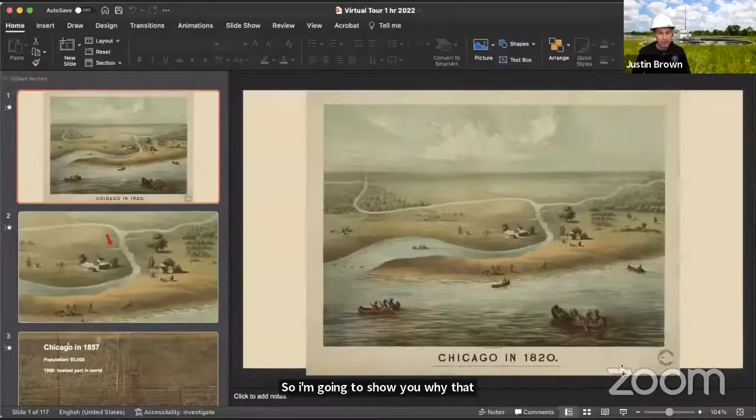Here's downtown Chicago in 1820. You can see some spots where the artist indicated that the banks of the river are not very well defined, maybe where the Clark Street Bridge is today. It looks a lot different. The city grew rapidly around the river.

In 1868, we had the busiest port in the world on the river. So the river was a transportation hub.

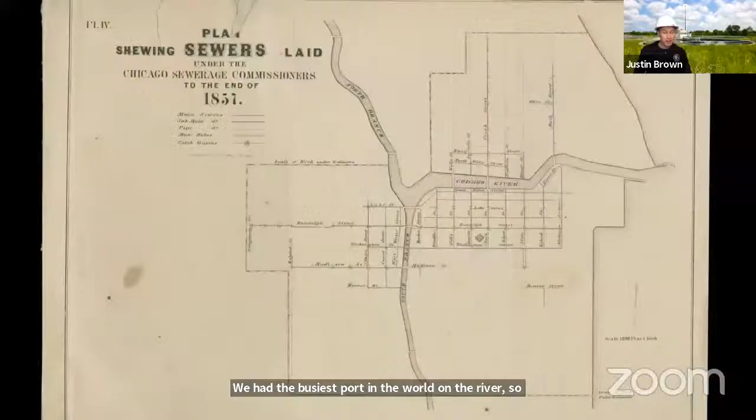The city began work on a sewer system in the 1850s. This map shows the beginnings of that system, which would become the first comprehensive sewer system in the US. It was originally designed to do two things: drain rainwater straight into the river, and carry sanitary sewage from homes and businesses straight into the river.

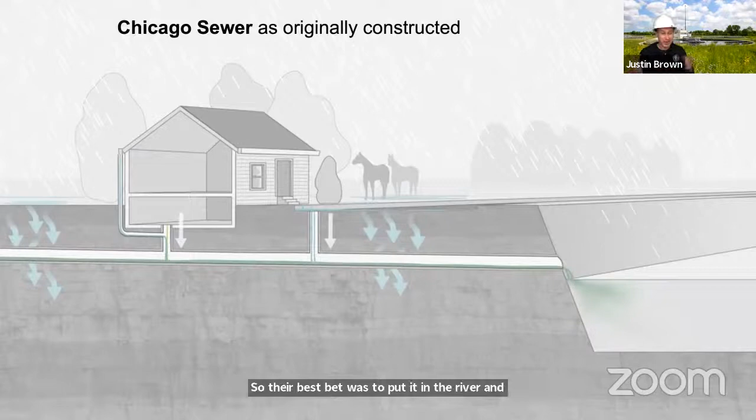Now, why would you put raw sewage right into the river? At the time, wastewater treatment technology didn't exist, so their best bet was to put it in the river, dilute it, and hope for the best. You can imagine that caused some problems, and we'll come back to that.

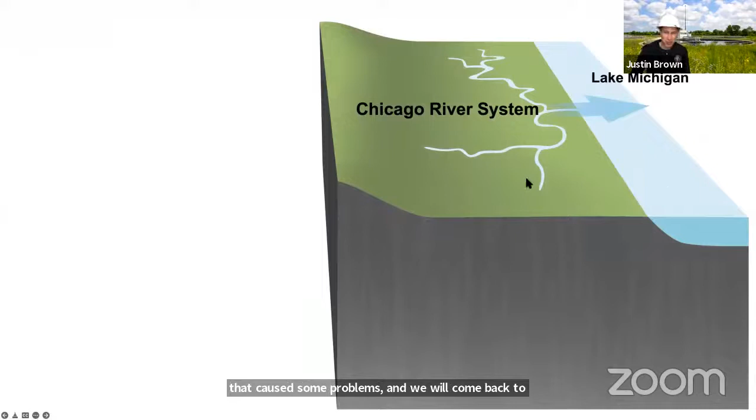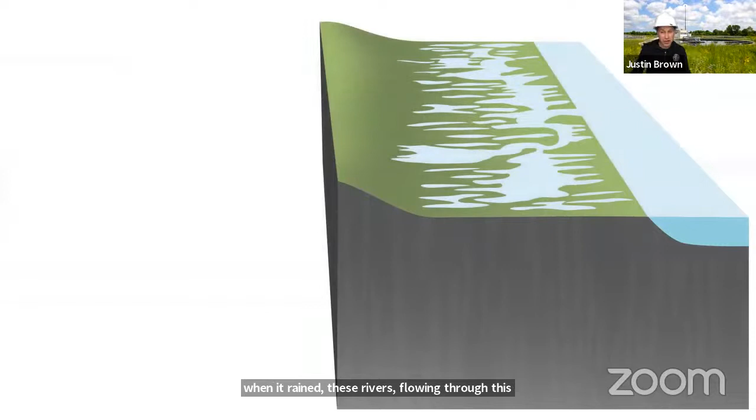This illustration shows the rivers as they originally were, draining out into Lake Michigan. When it rained, these rivers flowing through the flat landscape would spread out and flood a wide area. That's where the city was built, around the river. The sewers provided drainage, but they also polluted the river and flowed out into the lake, releasing pollution into the lake.

Our region's water supply source is Lake Michigan, so I think you can probably see the problem here. The river was threatening the water supply source.

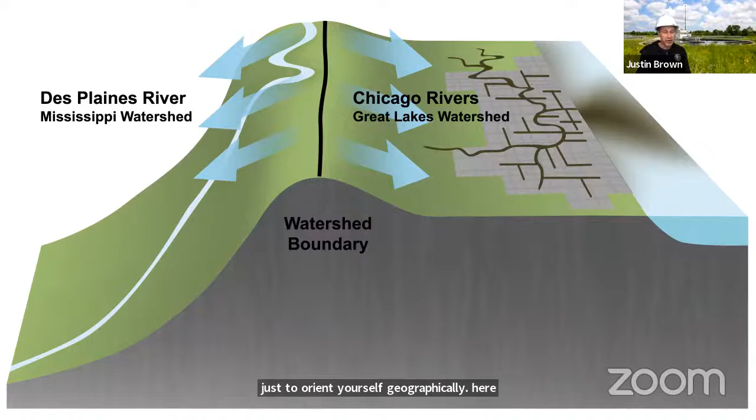Just west of Chicago, there is what's called a watershed boundary. You all, I believe, are in Westchester, so you're actually on the other side of this watershed boundary, just to orient yourself geographically here. A watershed boundary is just a high point in the landscape where water flows downhill on either side of it.

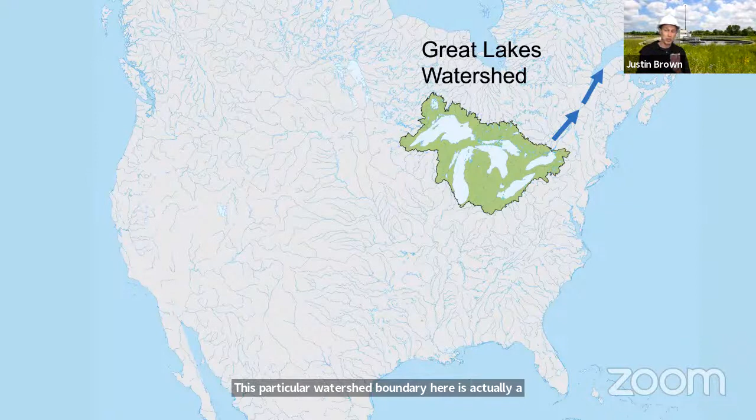This particular watershed boundary is actually a major one in North American drainage. The Great Lakes all drain out the St. Lawrence River to the Atlantic Ocean. The Mississippi River drains south to the Gulf of Mexico, and Chicago is right on the boundary between those two major watersheds. In that illustration I showed you, I exaggerated that hill quite a bit.

So we've got flooding in the city. Even with the sewer system, the flooding was still a problem. We have pollution threatening our region's water supply. The MWRD was founded in 1889 to address both of those problems by excavating a canal across that watershed divide.

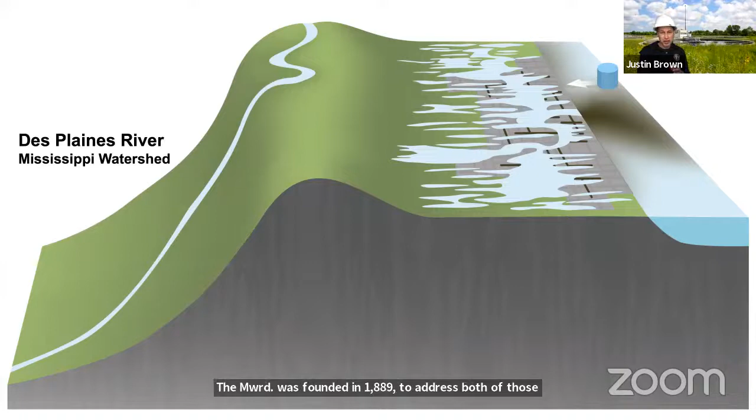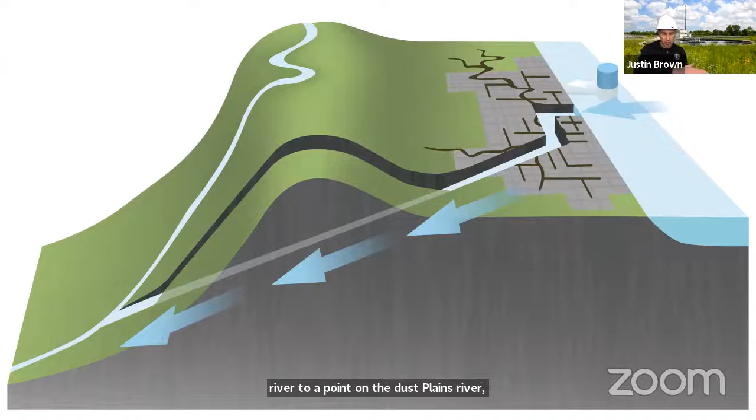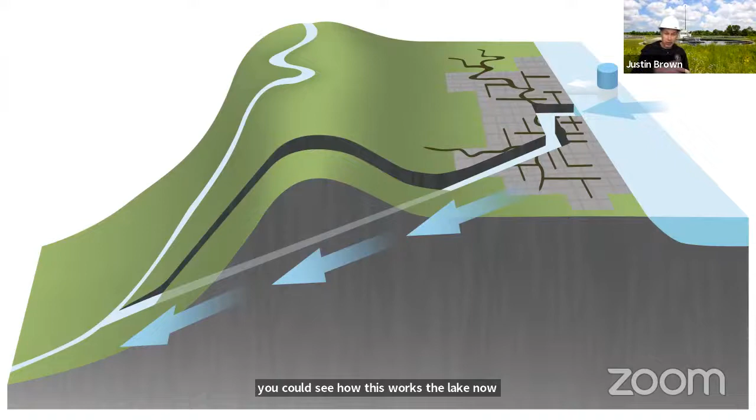The canal connects the south branch of the Chicago River to a point on the Des Plaines River in Lockport, Illinois, that's lower in elevation, about 37 feet lower. So you can see how this works: the lake now flows in at the mouth of the river and downhill just by gravity to the Des Plaines River across that watershed divide. So that's how you reverse a river. This map shows the rivers before construction of the canal.

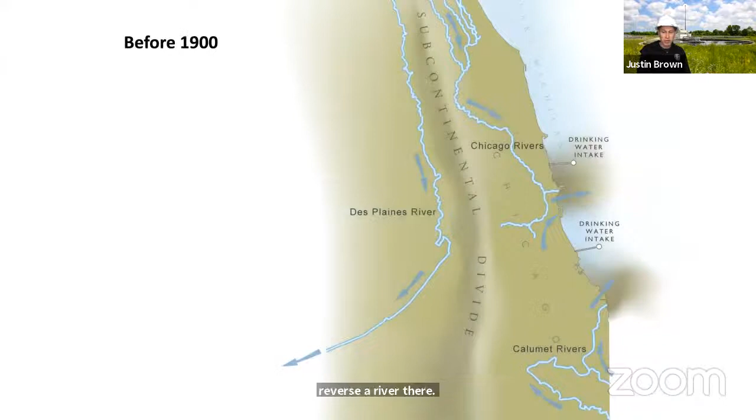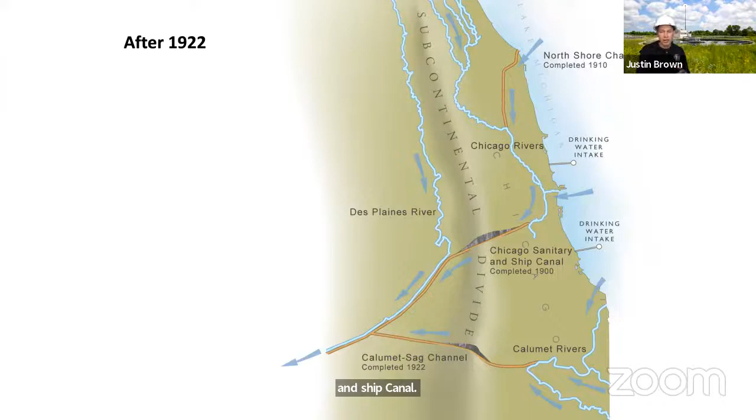Nothing like this had ever been built. Our chief engineer on this project went on to work on the Panama Canal a few years later.

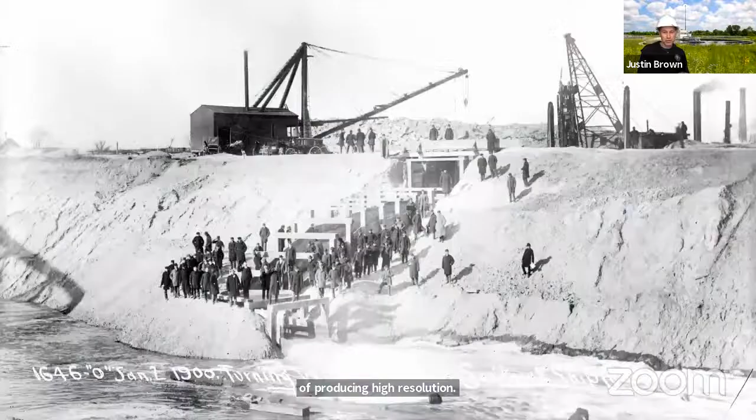On January 2nd, 1900, water was first turned into the Sanitary and Ship Canal. This is water flowing from the south branch of the Chicago River over an artificial dam down into the newly completed canal. This is the Sanitary and Ship Canal today.

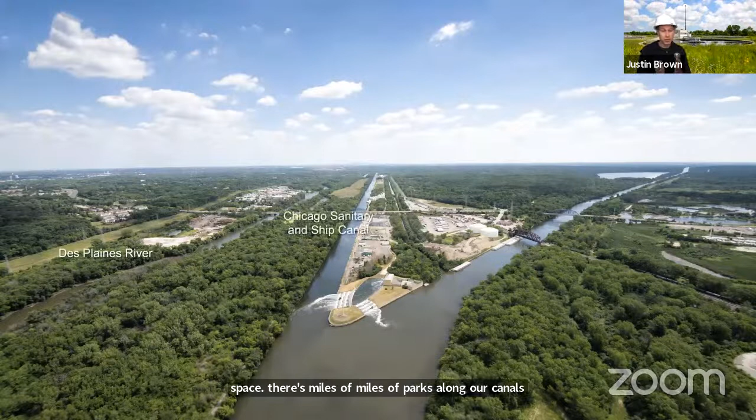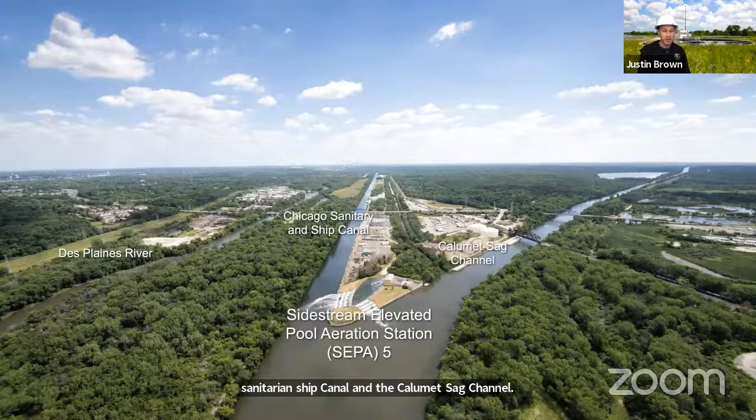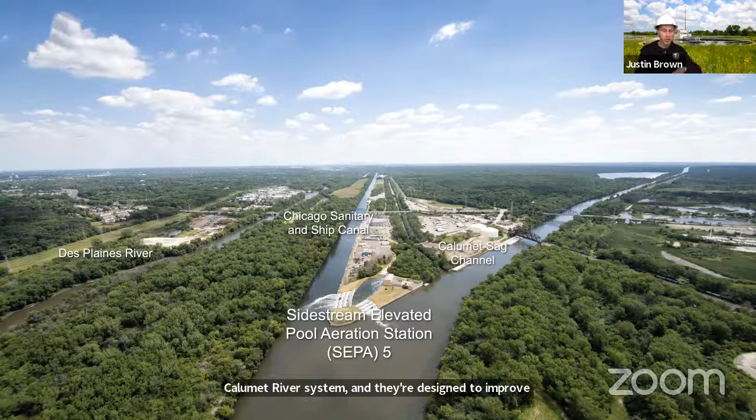This is the confluence, or meeting point, of the Sanitary and Ship Canal and the Calumet Sag Channel. That structure in the middle is a side stream elevated pool aeration, or SEPA, station. We have 5 of these on the Calumet River system, designed to improve water quality by aerating the water. They work by pumping the water out of the channel into a pool and then letting it flow over an artificial waterfall structure.

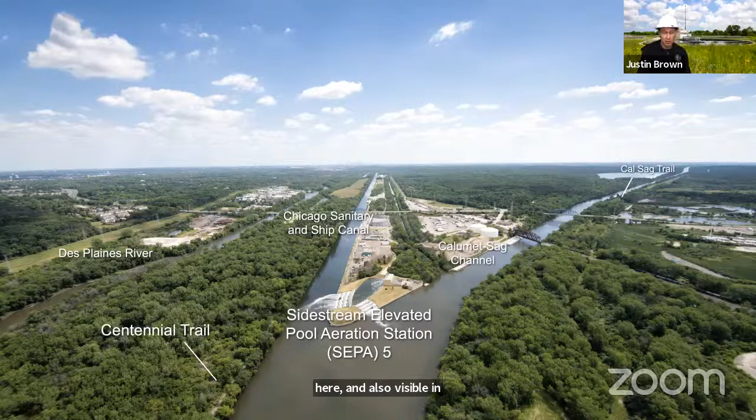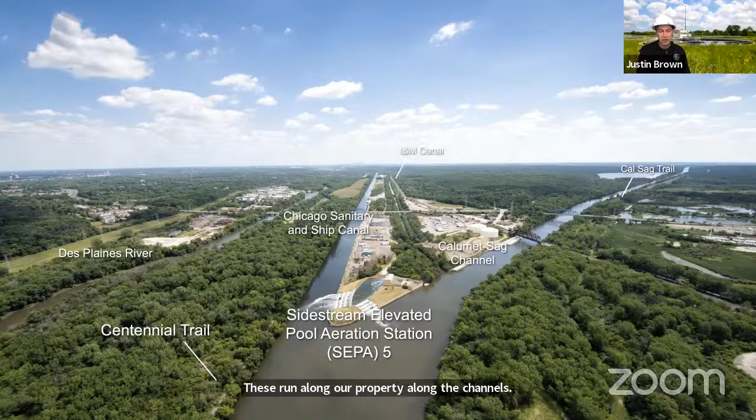You can also see the Des Plaines River on the far left here, and also visible in this shot are two great trails, the Centennial Trail and the Cal Sag Trail. These run along our property along the channels. And finally, that little channel you see there is the I&M Canal, an earlier navigation canal that predated the Sanitary and Ship Canal.

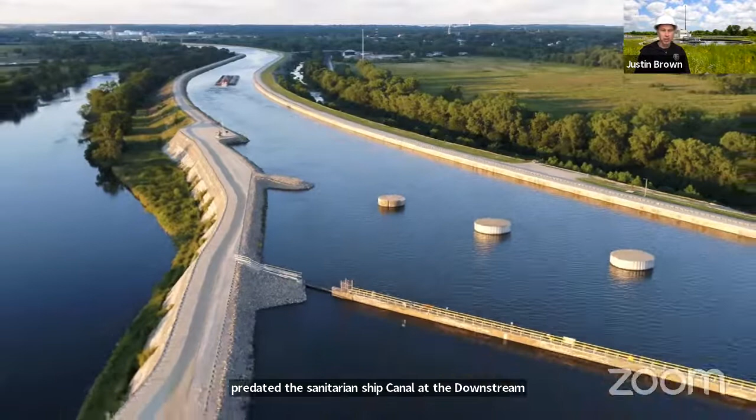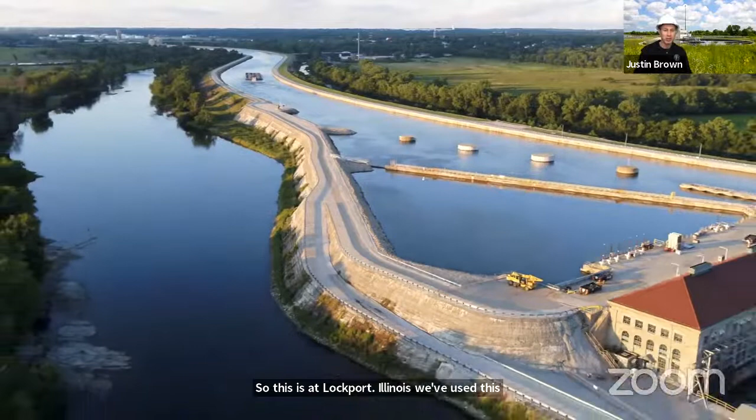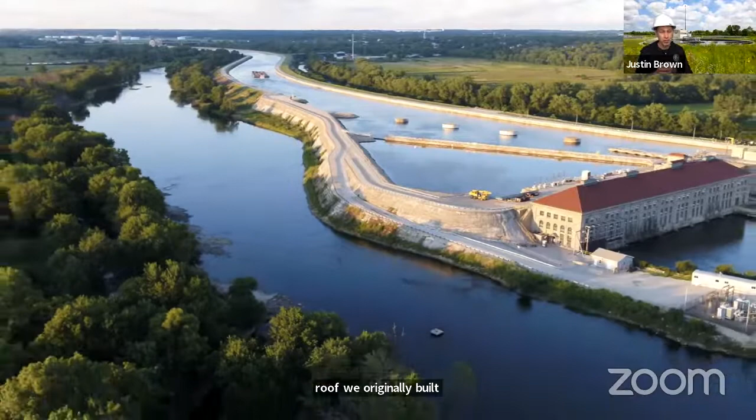At the downstream end of the waterway system, there's a 37-foot elevation difference between the canal and the Des Plaines River that it's flowing into. This is at Lockport, Illinois. We've used this elevation difference to generate hydroelectricity since 1907 at our Lockport Powerhouse, the building you see there with the red roof. We originally built our own electric transmission system to carry electricity into the city. Today we sell electricity back to the grid, and we make about $1 million a year on that electricity.

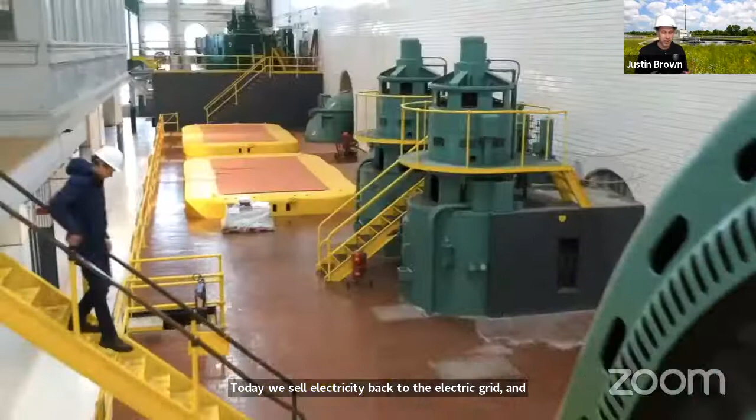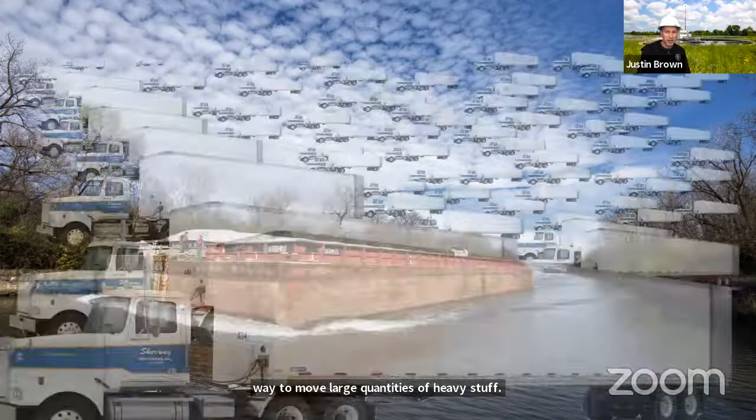Because the waterway system flows through so much of our region, it allows for barge transportation to transport bulk materials. Barges are an economical and environmentally sound way to move large quantities of heavy stuff. This is two barges here. One barge can hold 140 truckloads of cargo, and that's a ton of trucks to have off the highways. Barges are also a more efficient way to move one ton of cargo than trains, trucks, or other methods of transportation, so there are air quality and carbon footprint benefits to using barges.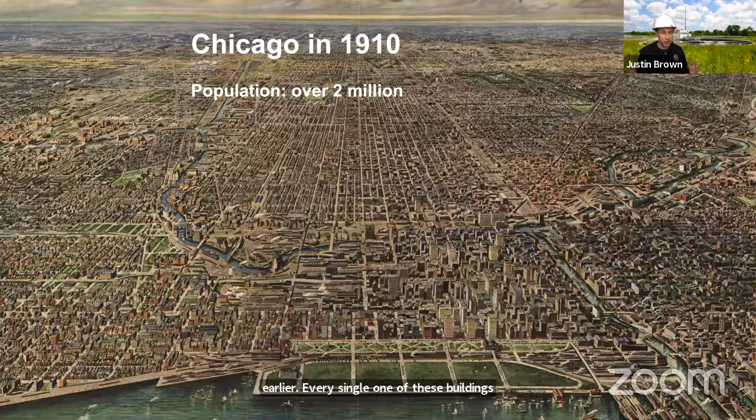So the waterway system worked great. It protected the lake from pollution, it provided drainage for our region, and the city continued to grow. But when you're looking at this picture of Chicago in 1910 with over 2 million people, I want you to remember that sewer system I talked about earlier. Every single one of these buildings was connected to a sewer that was draining raw sewage right into the river that you see here. So you can imagine what that looked like.

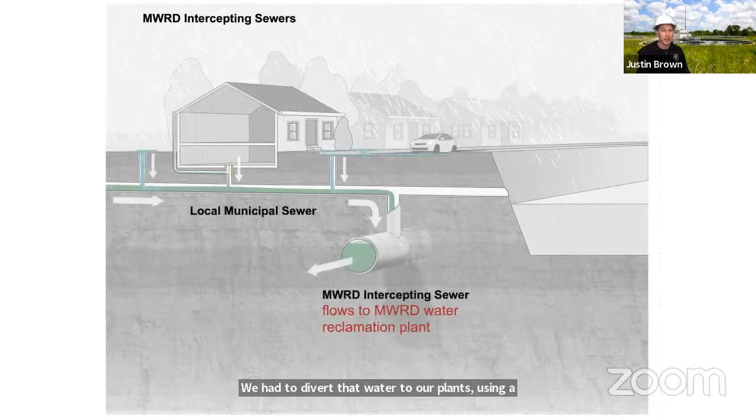Once we figured out how to clean the water, we also had to get it to our plants to be cleaned. You'll recall the sewers were all emptying right into the river. We had to divert that water to our plants using a system called intercepting sewers, which intercept the flow of the water and bring it to our plants to be cleaned.

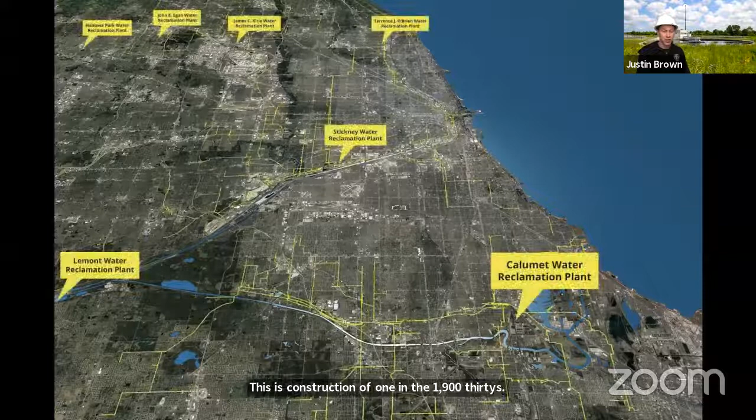Today we have 7 treatment plants. We have hundreds of miles of sewers, and we treat an average of 1.5 billion gallons of sewage a day.

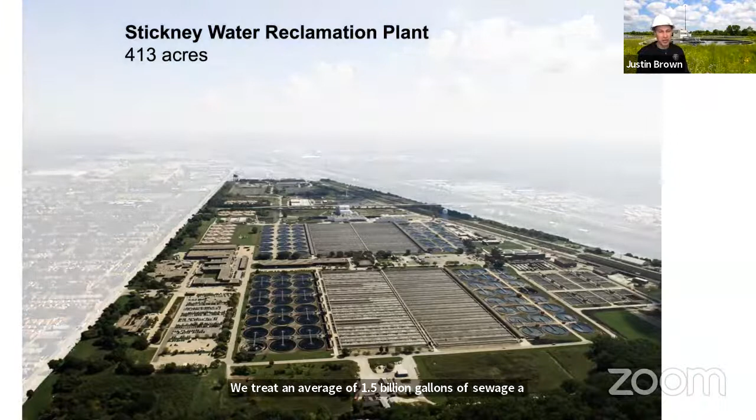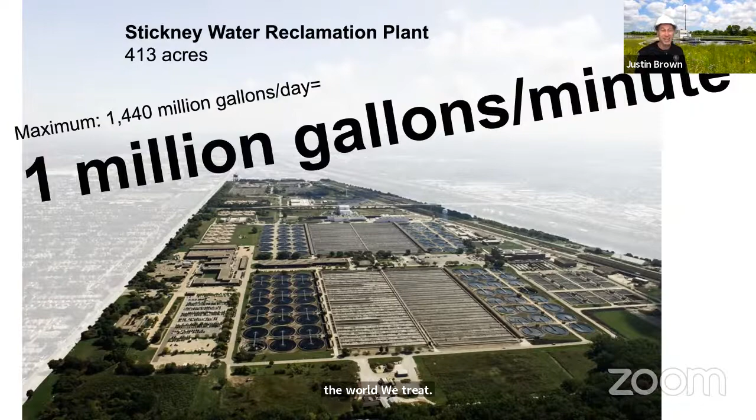Our Stickney Water Reclamation Plant is our largest, and it's actually one of the largest sewage treatment plants in the world. We can treat a maximum of 1 million gallons a minute at our Stickney plant. That is a lot of water.

I'm going to talk you through the process here, and then I'll show you some of this firsthand. So when the water gets to us, it's been flowing downhill through those intercepting sewers, downhill by gravity. They're at a slight angle, and the water is 40 to 50 feet underground, so we need to pump it up to the surface to clean it.

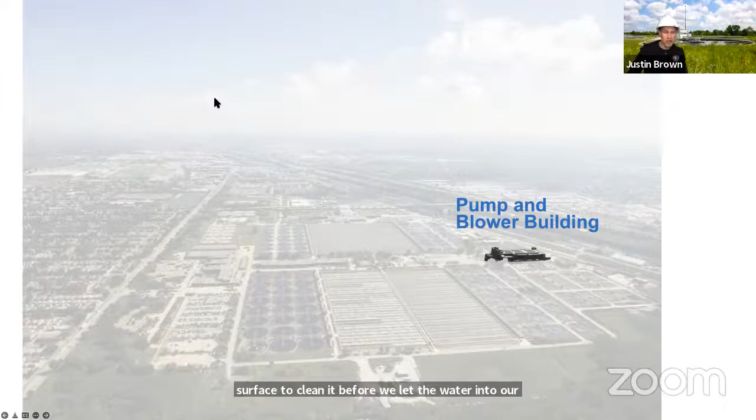Before we let the water into our pumps, we need to remove any debris that's washed down the sewer system. So we send the water through what are called coarse screens, which are basically like a metal fence that catch large debris.

Over the years, we've removed some interesting things: car wheels, more than one bowling ball, and lots of these little super balls, bouncy balls.

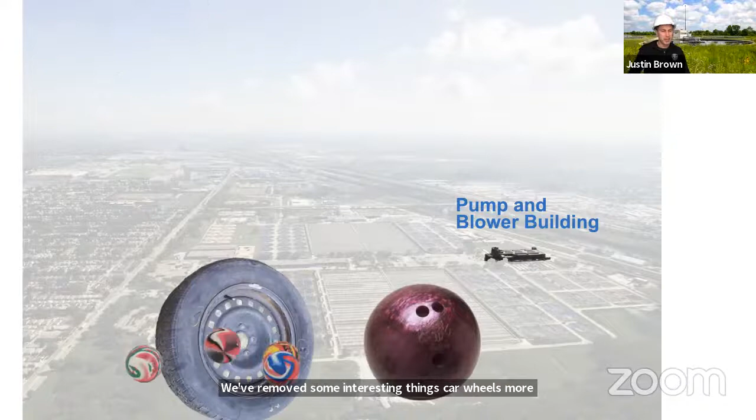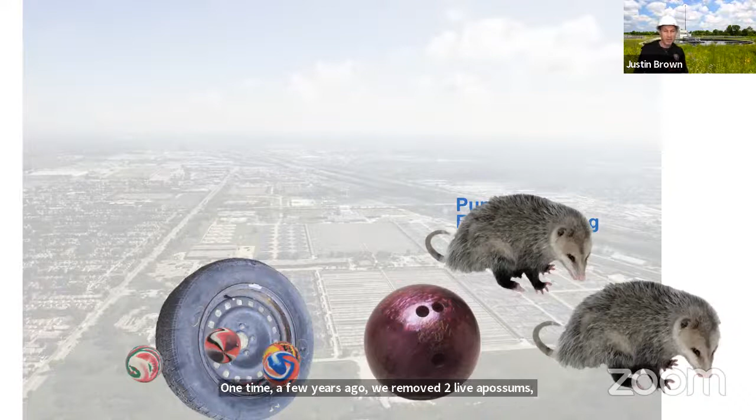One time a few years ago, we removed 2 live opossums, and we were able to safely remove them. They lived happily ever after on the grounds of the plant.

People ask if we sometimes find money, and yes, we do. I recently talked to a guy who claims he found a $100 bill on the screens at one of our plants. I believe him. I believe this guy.

From there, after we removed all that debris, we pumped the water up to the surface, and from here it actually flows by gravity through the plant. The idea is to only pump the water once and then let it flow through.

The first step is aerated grit tanks, where we add air to the water that removes rocks, gravel, and sand that could be abrasive to the rest of the plant. By adding air, it allows all that material to sink to the bottom of the tank, and it's removed and sent to a landfill.

Next, the water goes into primary tanks. In primary treatment, the water sits still, and any organic matter mixed in with the water sinks to the bottom, and that's removed and goes to a separate solids process.

Meanwhile, fats, oils, grease, and plastic float to the top, and that's scraped off, removed, and sent to a landfill.

The solids process happens in a different part of the plant, which I'll talk about more later. In primary treatment, just by letting the water sit still, we can remove 70 to 80% of the solids from the water.

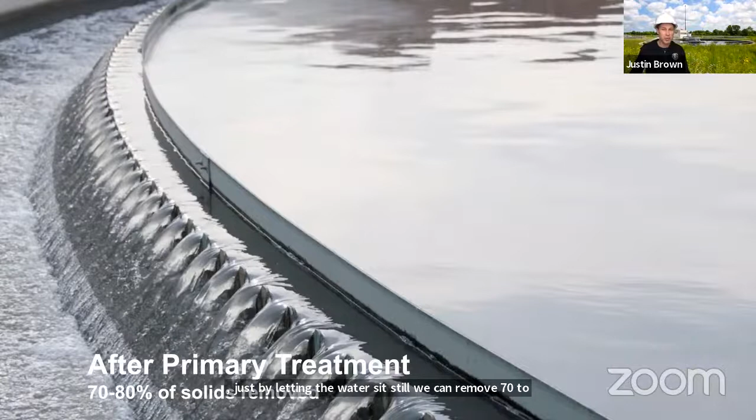After that, the water goes on to secondary treatment, which consists of two parts: aeration tanks and final settling tanks. The aeration tanks are just like a fish aquarium.

If you've seen bubbles going into a fish tank like this, that's done to provide dissolved oxygen for the fish to breathe with their gills in the water.

In the case of a sewage treatment plant, we add dissolved oxygen, aerating the water with air bubbles to make the conditions just right for beneficial bacteria that help us clean the water.

Now I'm going to talk you through how this process works, but in order to explain it, I'll have to show you a highly technical diagram. This might look a little daunting at first, but bear with me, I will explain it. All right, there we go.

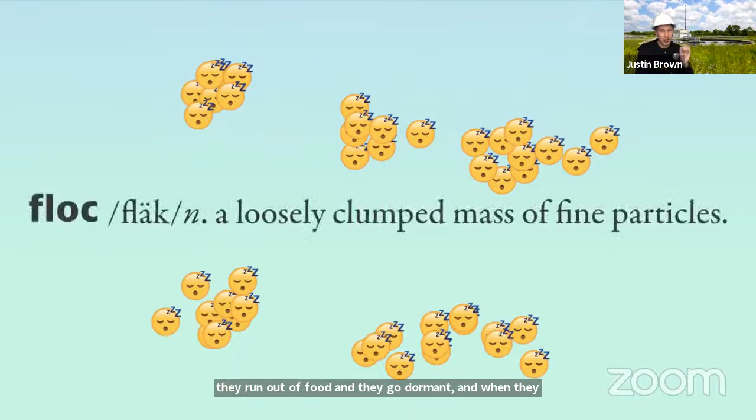behavior called flocculation - that's our vocabulary word for today. What happens is they run out of food and they go dormant. And when they go dormant, they form these little clumps or floc particles. Once they've formed clumps like this, they're able to sink to the bottom.

So now we've got clean water on the top and we got a bunch of beneficial bacteria on the bottom. So from here we let just the top inch or so of water flow out of this tank, and we send 95% of the beneficial bacteria back around to the beginning of the aeration tank to work again. 5% are sent to that solids process, and the clean water flows off the top of the tank.

So let me show you around some of this stuff and you can see what it looks like here.

This material is something we are providing for some national COVID studies that we participate in. They're doing COVID surveillance on wastewater coming into our plants. So we provide some of that material.

This is an example of a place that you would never get to go on an in-person tour. So enjoy the view here.

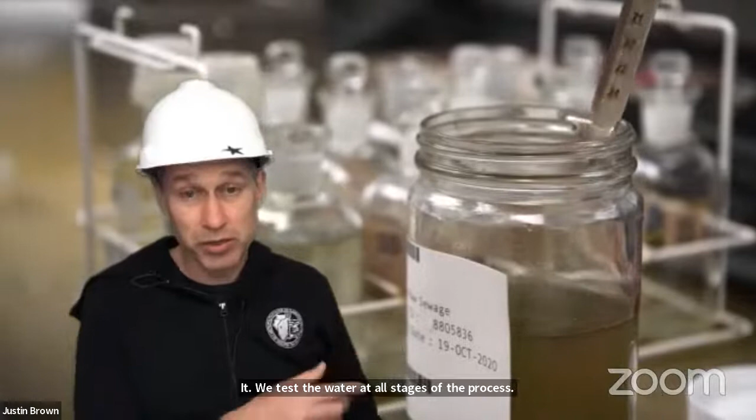We test the water at all stages of the process. This is a lab where we are testing the influent, so water flowing into one of our plants. We actually test water upstream of our plants at industrial dischargers before they release their water to the sewer system, to make sure they don't send us anything they're not supposed to.

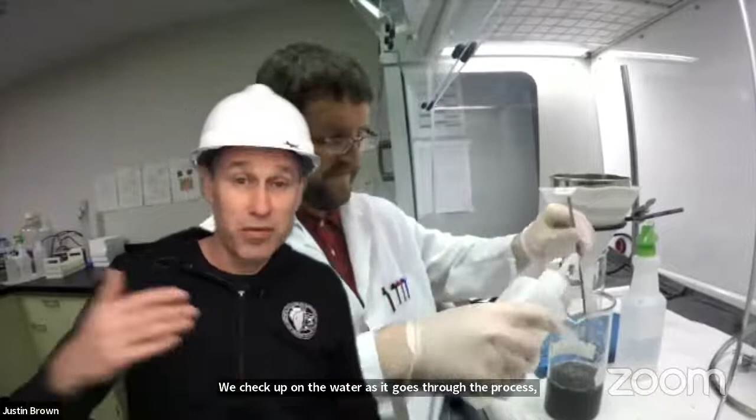And then we check up on the water as it goes through the process, and then most important of all, we check the water before we release it to the river. We have permits with the state of Illinois that define very specific parameters that we have to meet. So we don't just clean the water to some random amount that seems clean enough for us and then release it. No, we have very specific targets to hit before we release it.

In our microbiology lab, we check up on the biological process that's so important for us to clean the water to meet the requirements of our permits. We can learn a lot about what's going on in the plant by looking at what's living in it.

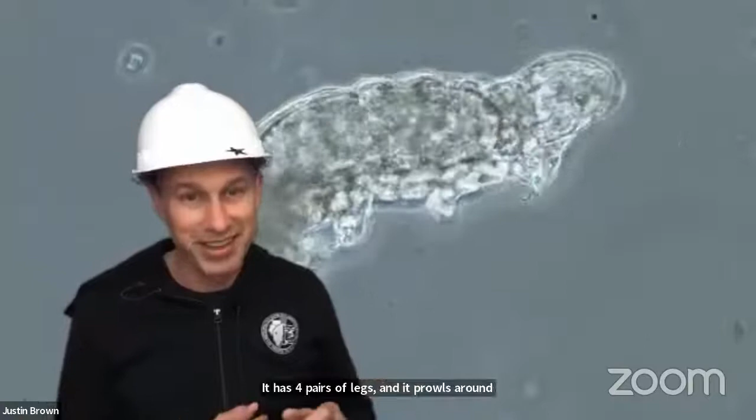Finally, this is the king of the jungle here, the apex predator of our treatment process: the tardigrade, or water bear. It has 4 pairs of legs, and it prowls around the tank and feeds on some of those other higher organisms.

Tardigrades are sensitive to ammonia, which is one of our permitted parameters, so it's something we're trying to reduce in the water. When we see them, we know we're doing well in regard to ammonia, so we like to see them.

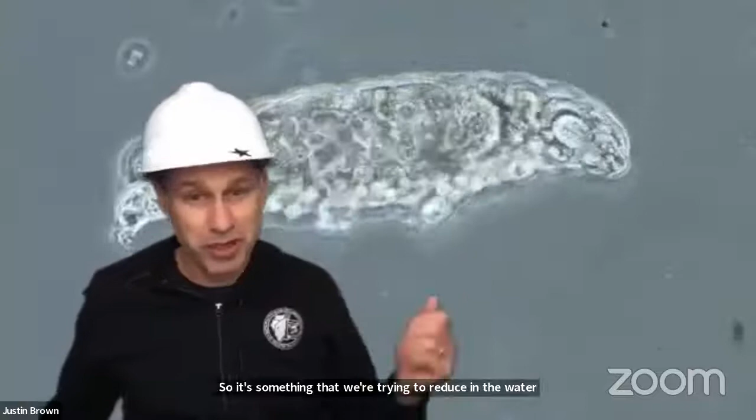This is a final settling tank. This is where those floc particles are allowed to sink to the bottom, and the top inch or so of the water is allowed to flow out of the tank. When the water enters from the aeration tank, it's all stirred up and the particles are mixed in. Once the water sits still and the particles have a chance to settle, it becomes very clear.

This water looks dark here because it's a deep tank—you're seeing deep down into this clear water. I think you can probably see we've got a kind of sandy, grainy appearance to the water, and that is exactly what we want to see in this final settling tank. It's working as it should. Here's an underwater view: we've got particles here, clear water here.

From there, at our O'Brien plant, our permit requires us to use ultraviolet light to disinfect the water before it's released to the river, and we do that with these huge arrays of ultraviolet light bulbs.

At our Calumet plant and some of our other plants, we use a chlorination-dechlorination process to do the same thing. In that process, the water flows through an array called a contact chamber—it's kind of like a maze-like array. After that, the chlorine is chemically removed from the water before it's released to the river.

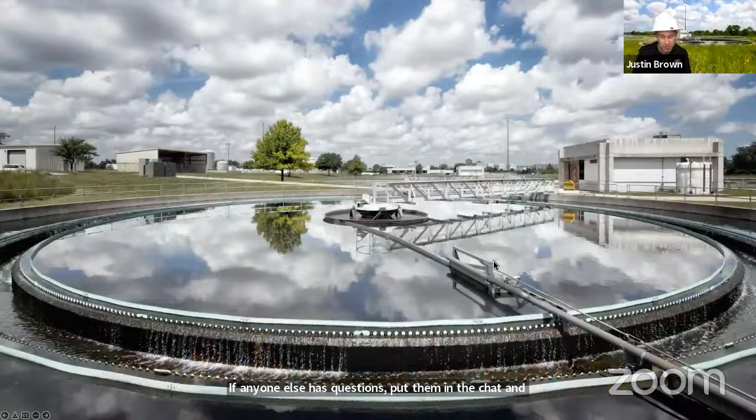All right, so this is a final tank here. Now I'm going to talk to you about the Tunnel and Reservoir Plan, or Deep Tunnel.

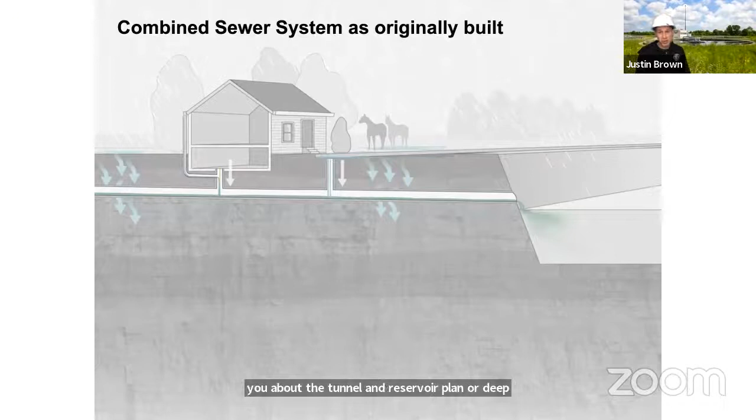You'll recall the combined sewer system originally went straight into the river, and then we built a system of intercepting sewers to carry it to our plants to be cleaned.

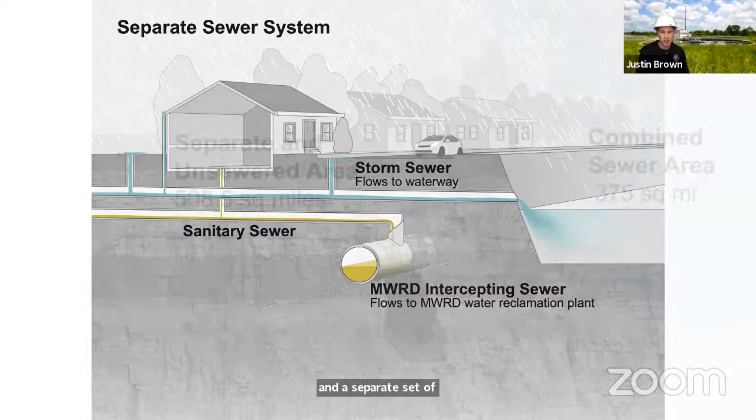Now there are some communities, including Westchester actually, where there's a more modern way of building sewer systems, called a separate sewer system. In that system, storm sewers carry rainwater and stormwater right into the river, and a separate set of sanitary sewers brings the water to wastewater treatment plants. In this map here, you can see the breakdown of how that looks.

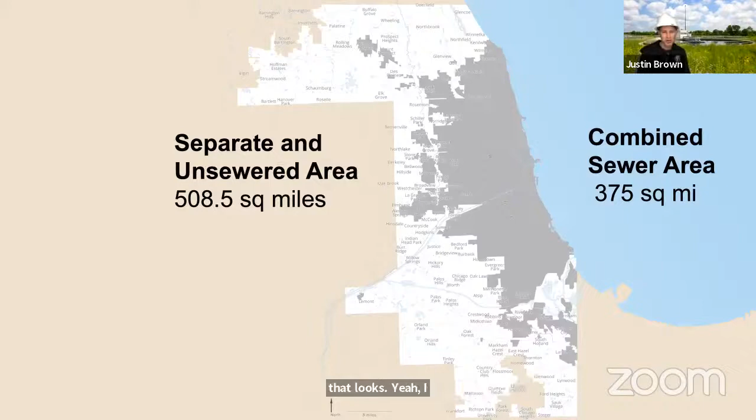Yeah, I see Westchester there. So you guys are in the white area, separate area.

Now the Tunnel and Reservoir Plan, or TARP, was designed specifically for the combined sewer area. So I'm going to show you why.

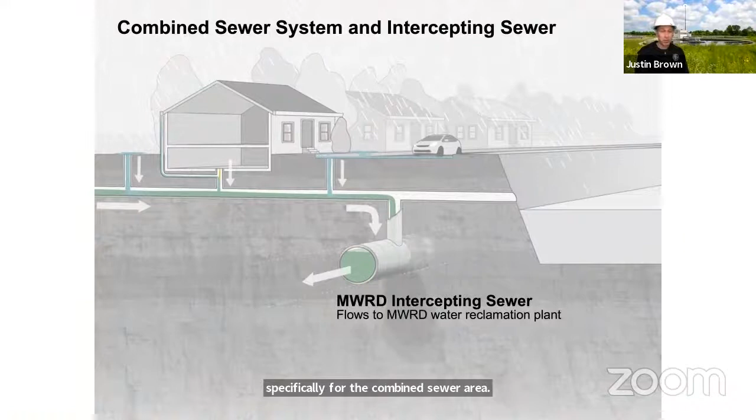When we get really heavy rains, we get more water entering that sewer that is carrying rainwater and sewage to our treatment plants. So the flow increases a lot, and we can't clean the water quickly enough. Even with the largest sewage treatment plant in the world, we cannot clean the water quickly enough. So what happens is the sewers are allowed to follow their original course and overflow to the river.

And that's bad for two reasons. First, it's adding extra water to the river, which is increasing the danger of flooding. And second, of course, it's polluting the river.

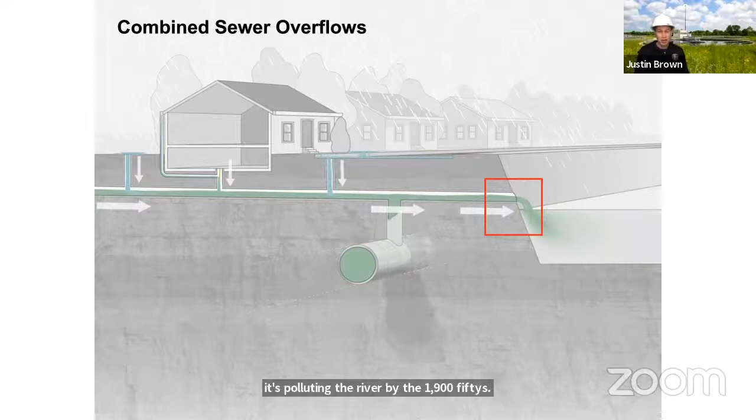By the 1950s, this was happening about 100 days a year on average. The Tunnel and Reservoir Plan was designed to catch that water in a system of huge tunnels and carry it to gigantic reservoirs. The idea of this system is to hold the water here until after the rain passes, and then pump it back up to the plants to be cleaned.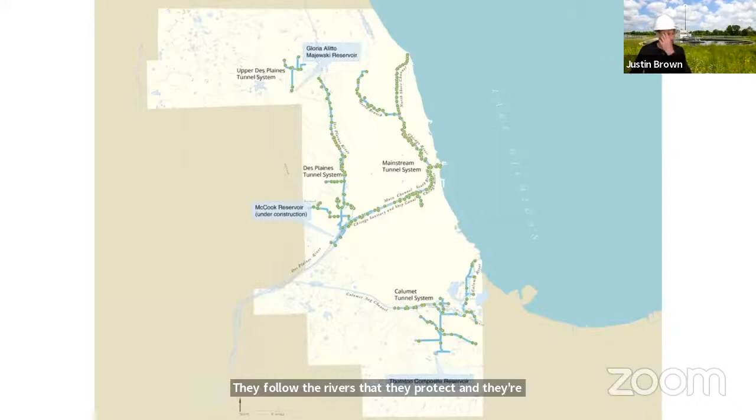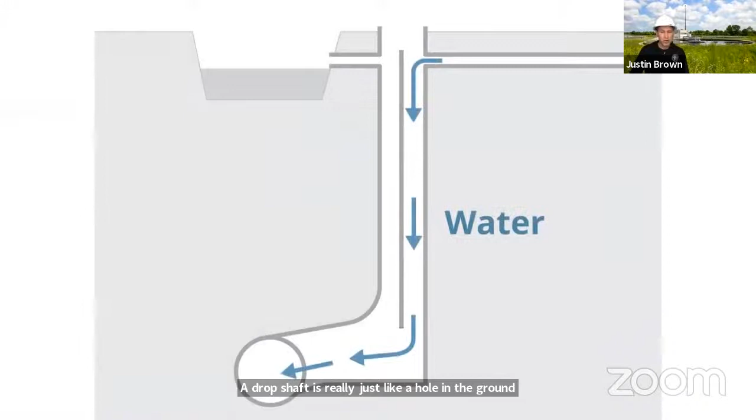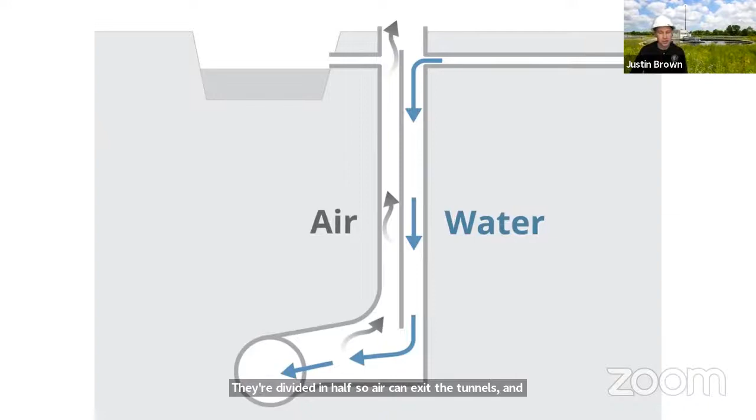This is a drop shaft here. A drop shaft is really just like a hole in the ground that water from the sewer system falls down into, into the tunnel. They're divided in half so air can exit the tunnels and the drop shaft as the water flows in. That's important because you don't want to entrap air in the tunnel system.

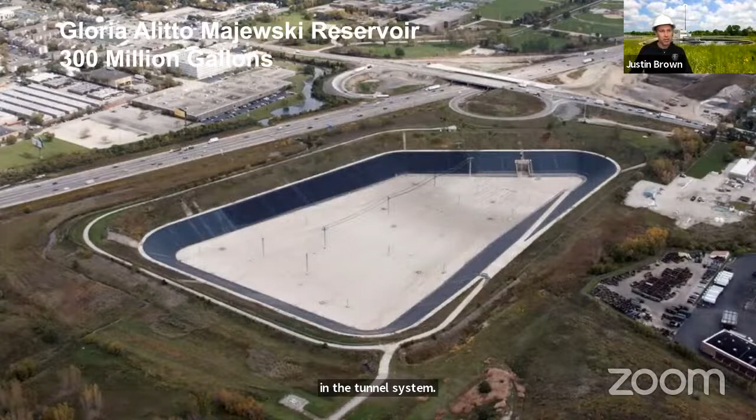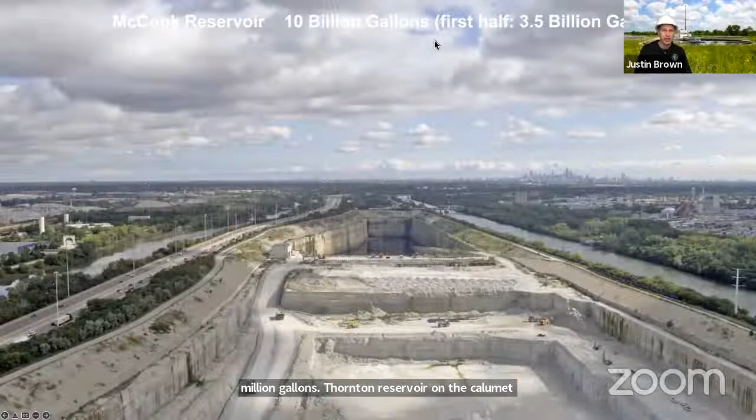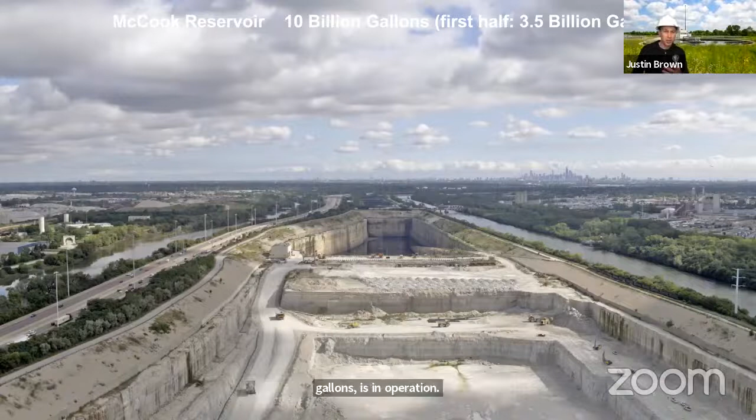We have 110 miles of tunnels. Our Majewski Reservoir near O'Hare Airport holds 300 million gallons. Thornton Reservoir on the Calumet system has a capacity of 7.9 billion gallons. Our McCook Reservoir is so huge that we are completing it in 2 stages. The first half, which has a capacity of 3.5 billion gallons, is in operation now. When the second half is completed, it'll have a capacity of 10 billion gallons, and it's going to be about a mile long. Here's a view of it with water in it.

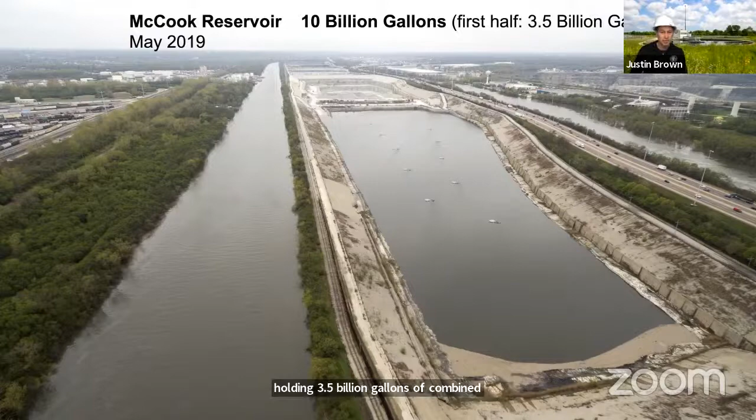The first half is holding 3.5 billion gallons of combined sewage that would have otherwise gotten into the river. When complete, TARP will have a final capacity of 17.5 billion gallons.

All right, so TARP is really huge, but the question is, does it work, or is it working? Well, we've been monitoring water quality since the early 1970s, so we have a huge data set of water quality information.

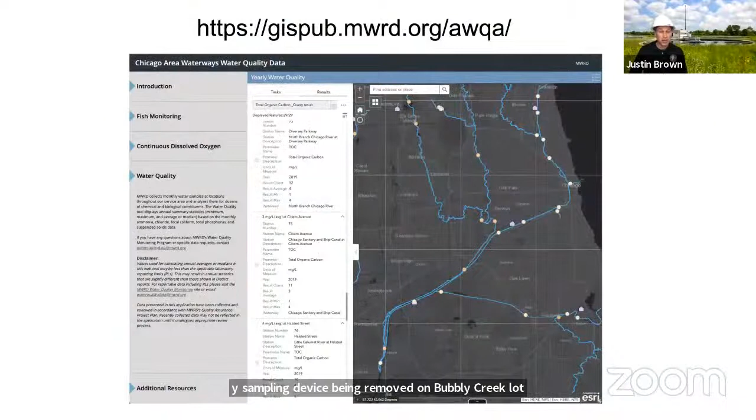A lot of our water quality data is available online in our online water quality data mapping tool, which you can get to through this URL here or our website, MWRD.org.

Another thing we do, besides looking at the quality of the water itself, is look at what lives in the water. We've been doing biological monitoring, including electrofishing, since the early 1970s, so we've got a data set of the biological health of the river going back for decades.

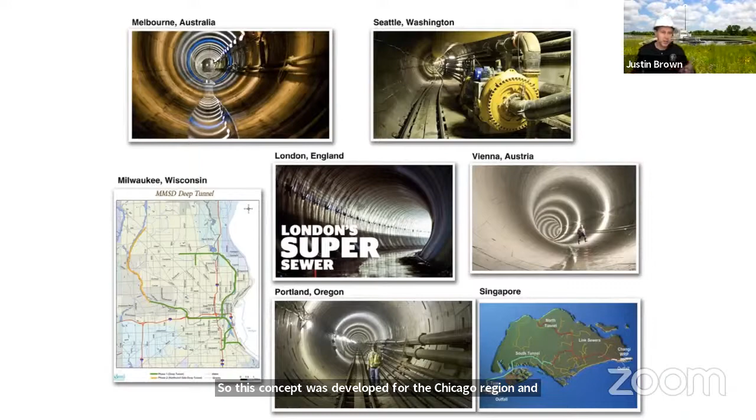One final indication of the success of the deep tunnel system is the other cities around the world that are building similar systems. This concept was developed for the Chicago region, and it's now being used to protect rivers in cities around the world, which I think is pretty cool.

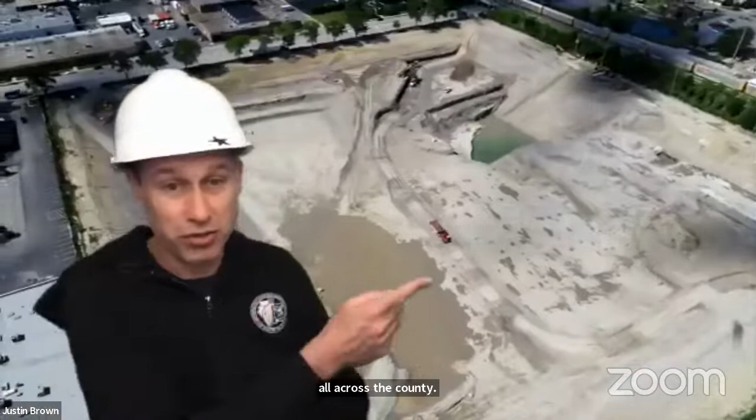As the Stormwater Management Authority for Cook County, we have flood control and green infrastructure projects all across the county. These range from large flood control reservoirs like Addison Creek Reservoir here under construction, to green alleys like this small neighborhood green alley in Berwyn. We've got a giant range of projects that I didn't really discuss here, but there's a lot of great partnerships.

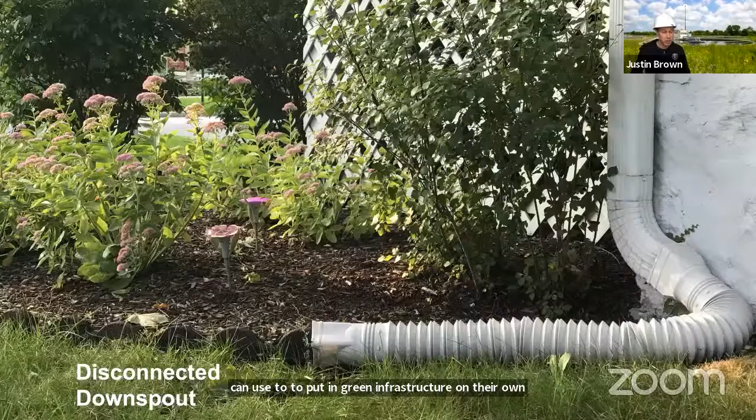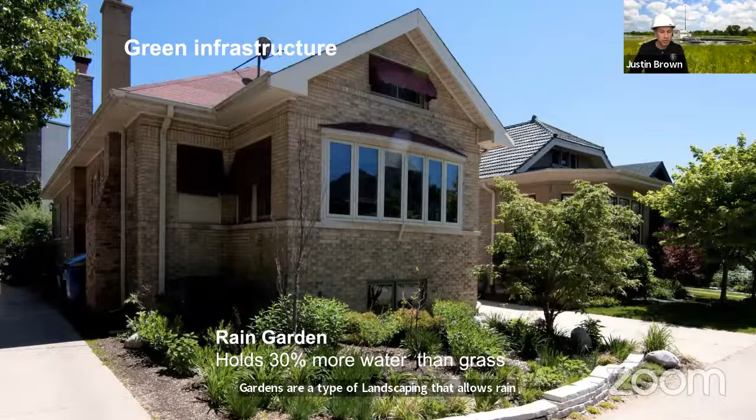Our Green Neighbor Guide has information that individuals can use to put in green infrastructure on their own property. There are some simple things you can do: disconnecting downspouts, installing rain barrels - we have a great price on rain barrels on our website, MWRD.org. Pervious pavement is a way to pave an area that allows water to soak in. Rain gardens are a type of landscaping that allows rainwater to soak into the landscape much more than grass would. Green roofs hold rainwater on the roof of a structure. And native landscaping is another way to help absorb rainwater - native plants absorb more rainwater than grass, and also have really good root structure.

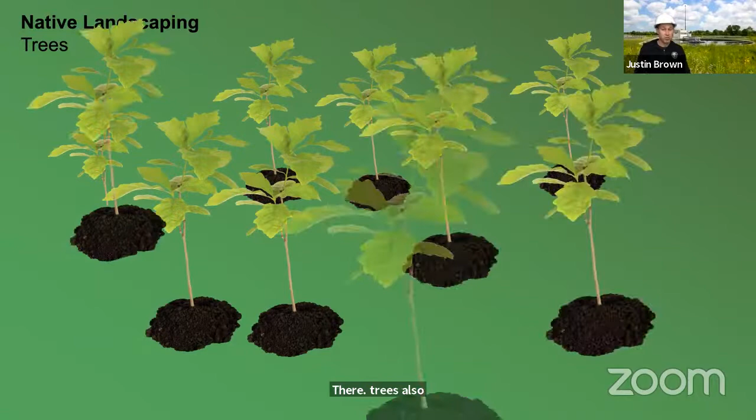Trees also absorb lots of rainwater. In our Restore the Canopy program, we have distributed over 100,000 native trees and tree saplings in the area over the past several years, and we continue that program today. You can find information about that at our website, MWRD.org.

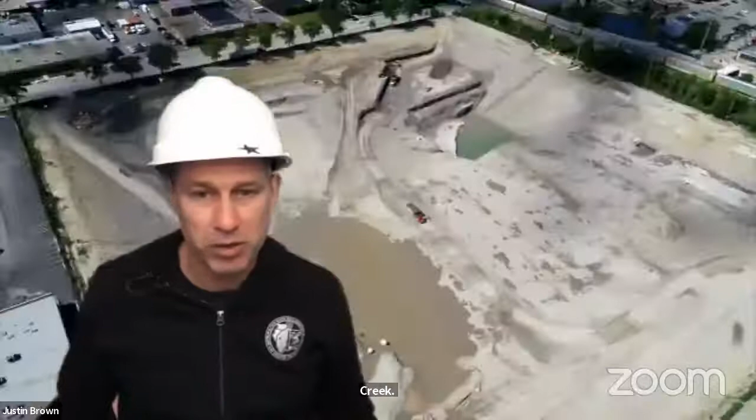Anything else? We had one from the live stream: does electrofishing help at all with identifying any invasive or non-native species? Oh yeah, definitely, that's how those fish are identified. We haven't caught any Asian carp, if that's what the questioner is wondering about, but there's certainly lots of non-native species. My wife is a fish biologist, so if a non-native species isn't causing terrible problems, you just call it non-native. If it's causing a lot of problems, it becomes an invasive species. That's how you'd identify those. When I mentioned the fish population is growing, certainly some of those are non-native fish.

Do non-natives get thrown back in, or are they kept? Oh yeah, yeah, we're not... I don't know if they have a protocol for that. I think if they caught an Asian carp or some particularly nuisance species, they might not throw it back.